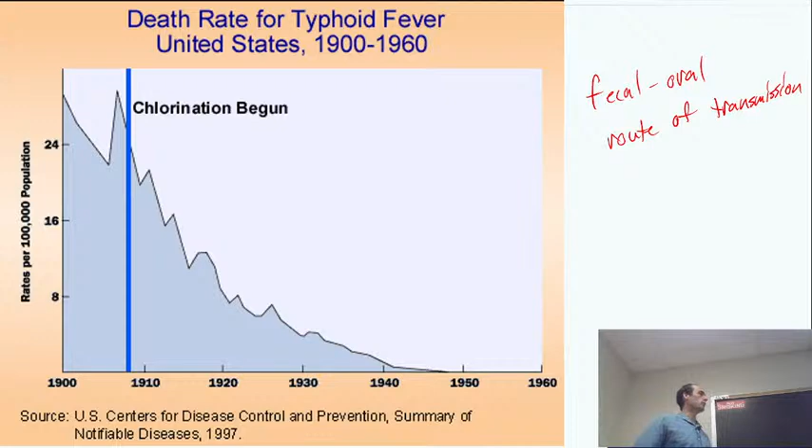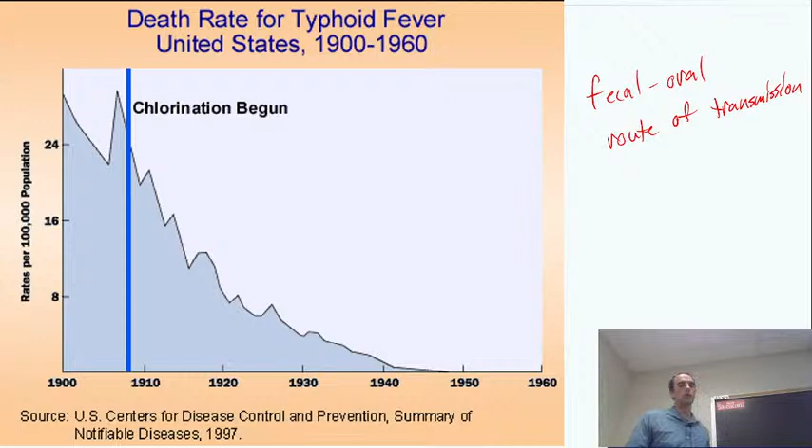It's not just treating our drinking water. That is clearly important, and if we did it perfectly, that would be great. But there's still some other factors. What about the food we eat? What about if we were to use water to irrigate some crops and then eat the crops? Are we contaminating our food? What about swimming and things like that, right? So there's important reasons why wastewater treatment can also contribute to control of that fecal-oral route of transmission.

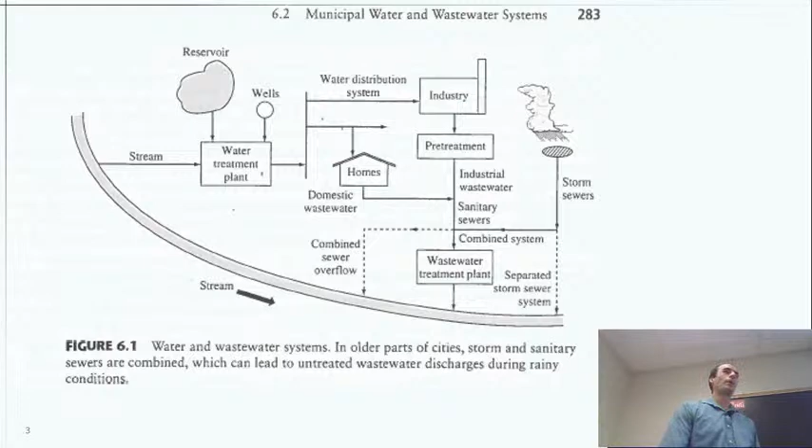What we'll find is protect the intended uses of the receiving water that's going to take the wastewater. It's got to go somewhere. We can't just make all the waste disappear magically, right? So we've got to do something with it and send it somewhere. So we're going to talk a lot about the secondary treatment aspect of wastewater. I have a few things to talk about for primary treatment. We've already covered a fair bit in the sense that we've done sedimentation, right?

So one thing to keep in mind is in the class overall, we've covered some physical processes, sedimentation being one of them. We've covered some chemical processes, so what we would do with disinfection, for example, directly relevant to our wastewater treatment. What we haven't really touched on much yet is biological processes. So we've kind of broken up the class into physical, chemical, and biological aspects of water and wastewater treatment. Okay, so we're going to tie things together a bit in that manner.

I'm only going to get partway through today of my intro, and next time we'll pick up with a bit more on the regulations and maybe a couple examples of the screen and bar rack before launching into secondary treatment, which primarily involves some form of a bioreactor. We are feeding microbes as much oxygen as we can because we want them to feed on all the junk that's in the water, right?

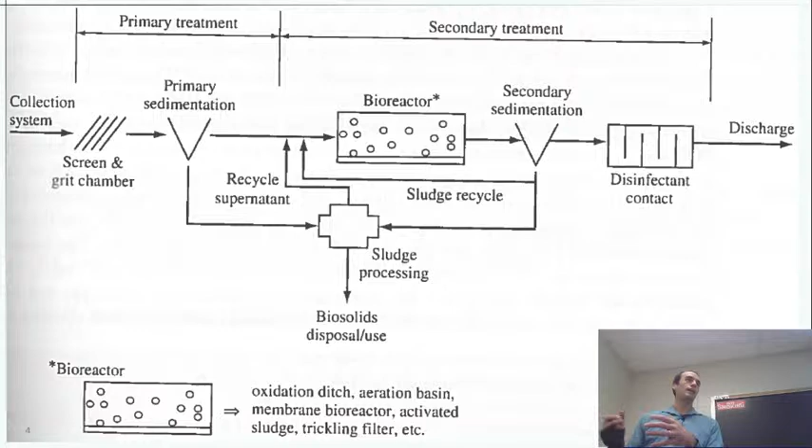If we have dissolved molecules, proteins, fats, lipids, sugars, whatever it is that microbes could eat, we want them to be eating it as much as they possibly can so that we convert something that is dissolved. It's pretty hard to grab one molecule out of the water, so we convert that into a cell, because bacteria cells can then clump together. Then they could settle. You could grab them, you could filter them. It's a lot easier to handle a cell than it is to handle one little sugar molecule floating around, right?

So the concept here, in some sense, really goes back to that thing I showed you the first day, right? We send some water through a process or some media, something happens to it, and now we have a little pile of stuff, right? That's kind of what we're trying to do.

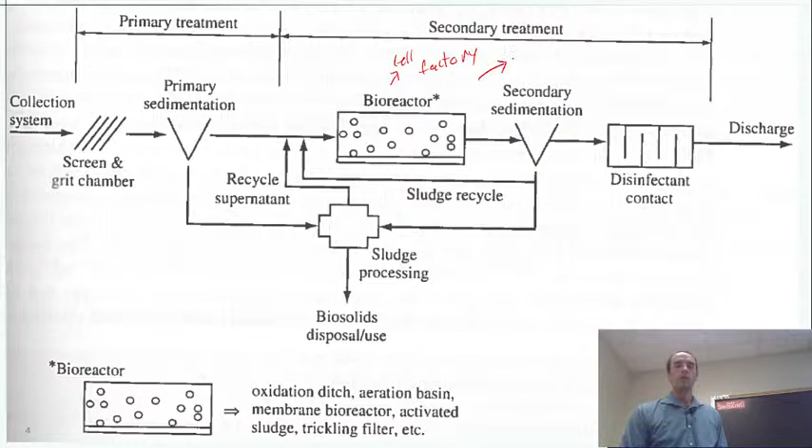And the process here largely relies on the bacteria eating the stuff, creating more cells, right? So this is a cell factory, we could call it. Typically, we will use an aerated system. That's kind of the conventional. That would be a waste-activated sludge. So cell factory is my silly term for today, but typically you'll call this waste-activated sludge. So if you ever see that terminology, it's activated because we are feeding it oxygen. It's sludge because we're creating a slurry of cells and bacterial mass and whatever else might still be in there.

And it's wastewater, right? So then what we do with that is we send it through clarifiers. Clarifier and sedimentation basin are essentially synonymous, but in wastewater, it's more often referred to as clarifier, for whatever reason. So what's going to happen is, if things are working well, then we'll create a lot of bacterial mass that we can settle. So we'll settle a lot of bacterial mass, then be able to recycle it,

in part to keep lots of bacteria in the influent. Because if we were just to dump all the bacteria every time and get rid of them all, we have to start from zero, whatever happens to be in the pipes. There's going to be some bacteria in the pipes for sure, but it's not at a high concentration like we want it for the bioreactor to be doing a lot of food consumption, right? We want a high amount of bacteria there, so we manage that pretty carefully. Some of it is sent to sludge processing. Talk a little bit more about that later.

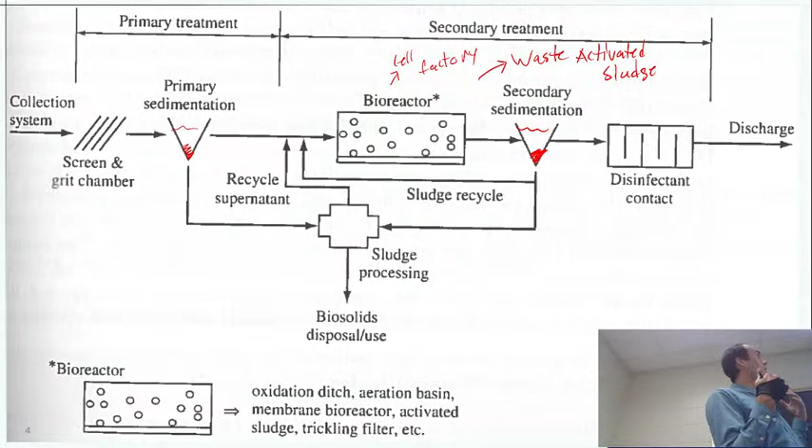Of course, we're going to get some here as well. This will include more than just bacteria. That'll be other junk. So we'll recycle this nice bacteria mass that we've created, or a portion of it, and on a mass basis, we'll actually talk about it as milligrams per liter of bacteria stuff. So on the scale of wastewater treatment, we do grow so much of it that we will often refer to this as milligrams per liter of volatile suspended solids, VSS, or sometimes mixed liquor suspended solids. We'll come back to these terminologies. But basically we can weigh it out because we have so much of it.

Now that doesn't mean there's no bacteria left, right? If we can settle it, there's still some free-floating bacteria there, so we have to do some disinfection. Probably some viruses too, right? Maybe some of the viruses were eaten by bacteria in this bioreactor, but chances are there's going to be some viruses left. So having a disinfection step is good if we are concerned about that for public health exposure. Some countries don't disinfect their wastewater. France, for example, is starting to think about doing so, but conventionally they haven't.

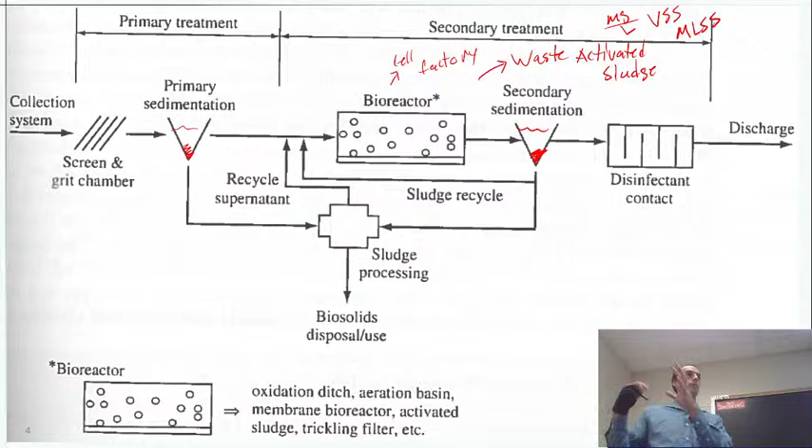All right, so that's kind of the big picture. This would be a typical wastewater treatment setup for a municipal plant. Secondary treatment is generally considered a biological treatment plus a clarifier, something to grow lots of bacteria and then to separate them back. We can add in the disinfection step as part of that, but if we add any tertiary, it would probably go here. We'd still need disinfection, but it kind of throws a wrench in how you distinguish them all. Tertiary treatment would be something like nutrient removal, or if the receiving water had to be especially clean in some particular manner.

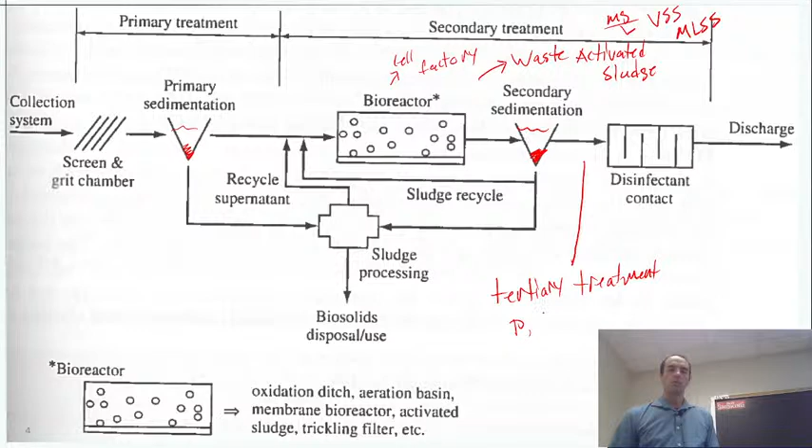If we had to do pH adjusting, that probably wouldn't even be counting here. But if we have maybe some fancy anaerobic, aerobic cycling, that might be constituted here. So we could say phosphorus, nitrogen removal, steps like that. Sometimes you might have a specific step to try to convert ammonia into less harmful things. The more advanced stuff, we're not going to spend too much time on. I'll give you a few examples, but generally that would happen after the primary consumption of the waste. So the initial bioreactors, we're trying to get lots of the carbonaceous waste, lots of stuff that would demand oxygen.

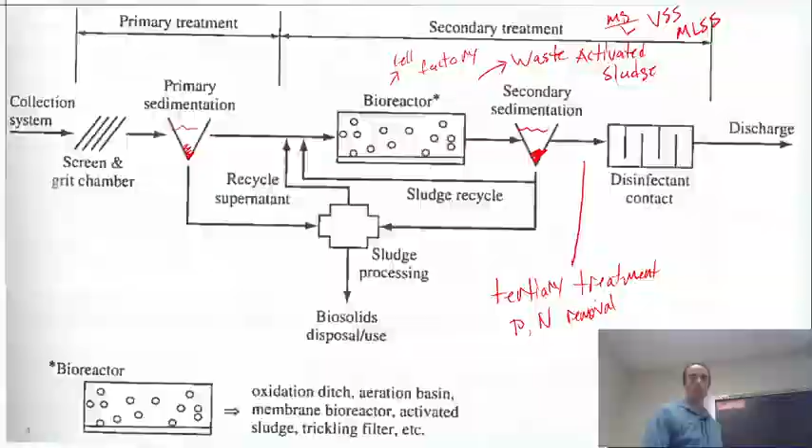Okay, so our wastewater regulations are really designed based on the idea that we want to protect intended uses. Oftentimes that means the receiving water itself will determine what treatment we need. So if it's a very pristine river or stream, it's not going to be able to handle the same amount of ammonia without impacting the wildlife as the Mississippi would down here, right? A tributary to the Mississippi way up north may be ecologically very vulnerable to a bit of ammonia or a bit of oxygen demand.

Here, there's just so much stuff in the Mississippi by now and so much water that when the South Baton Rouge wastewater treatment plant discharges to it, sometimes it's an improvement to the water quality, according to certain metrics, right? So their goal is kind of like to not be as bad as the Mississippi. So they have a funny situation there.

But so some of the regulations are based in part on the receiving water. Some of them we have just minimum standards. And some of the permits and things will be calibrated accordingly to what's needed. So the EPA, for surface water discharges, they have the NPDES system, and they delegate that to most of the states.